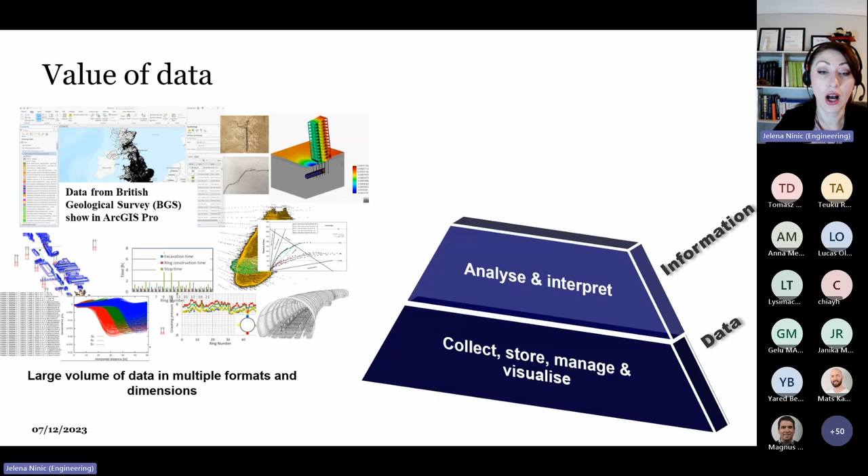What our goal is, is actually to start with this data and then proceed and research from collecting, managing, and visualizing this data to actually extract some information by modeling, analyzing, and interpreting this data. Moving forward to this pyramid of knowledge, from this analysis and interpretation, we always want to learn and to improve. And finally, we want to become wiser. So we want to generate models that are scalable, that are generalizable, that are shareable, and all this is very research intensive. You will all appreciate that digitalization in engineering is overall a new, let's say, arena.

Perhaps starting in the last 20 years, and digitalization in geotechnical and underground engineering is even a bit more recent trend. If we look at the research published over the past 15 years, we can see an increasing trend in research and journal publication in BIM for underground engineering and tunneling.

We can see that BIM for geotechnical applications, including slope stability, foundations, deep excavations, and so on, is also an increasing trend due to its obvious importance. However, it's a bit lagging compared to BIM for tunneling.

If we look at the latest demands for underground engineering, we know that our projects are not only required to be robust, cheap and delivered on time, but they must be risk-free and sustainable. This is something that more and more will be included in research, education and practice.

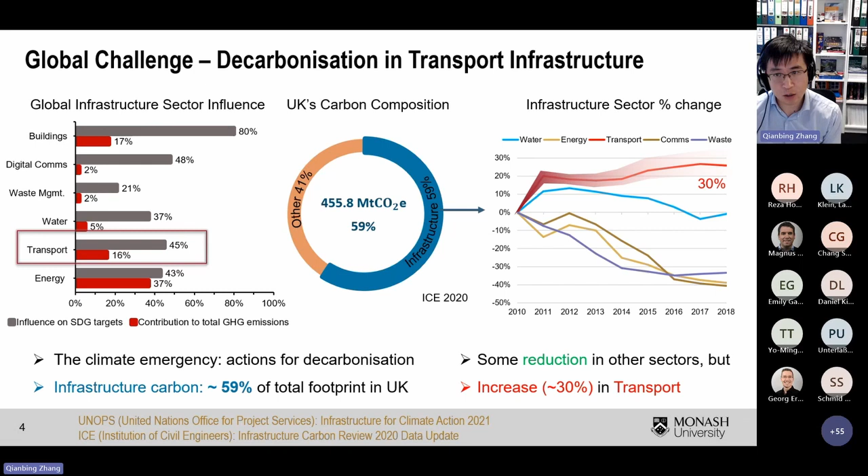CO2 emissions have been organized by different organizations, and one of these is the GCCA CO2 emission reduction potential. We can see up to 2050, the emission reduction potential toward net zero, with the majority of the contribution being relevant to our research. We can see clearly most of them are relevant to our research.

For example, the highest potential would be CCS, carbon capture and storage. And others, for example the first one, efficient design and construction, efficiency in concrete production, are all directly relevant to the infrastructure we're going to build.

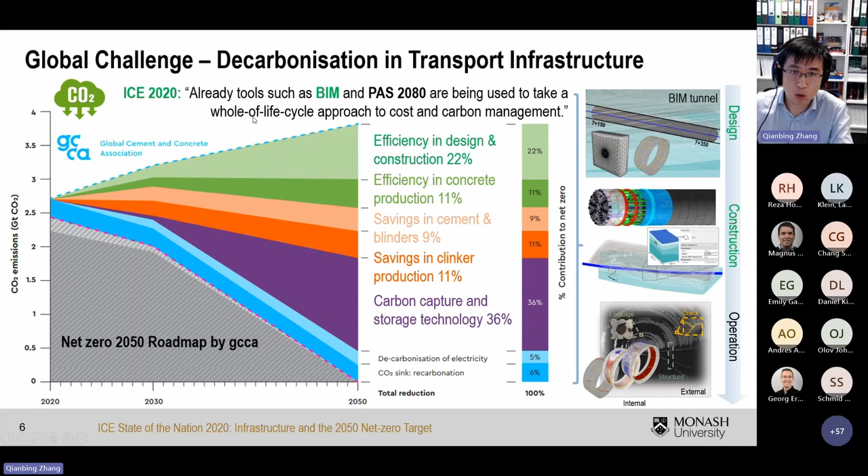In terms of BIM, we mentioned a lot at the beginning, particularly summarized by Jelena on digital transformation globally. We can clearly see globally that most countries have already placed BIM or digitalization as mandatory for the majority of major infrastructure projects. We have summarized most of these standards implemented in current major infrastructure projects.

If you're already aware of, or trying to understand how BIM will influence your project design, this provides some very draft design guidelines. In terms of design, particularly digital underground construction, we have one review paper covering BIM, machine learning, and computer vision in digital underground construction. If you have any interest in underground construction technologies, this can provide you some references, particularly from the best resources to understand more about digitalization.

So the majority of organizations already implement digital and decarbonization into project design. Once we look at this, the most popular rating standard systems have been summarized here. UK, Europe, and Australia have different standards.

If we summarize all these standards together, since each has different focuses, we can clearly see this, particularly since 2010, and most of these standards have different versions. Most of what's summarized in this table has been used for infrastructure, not only for buildings.

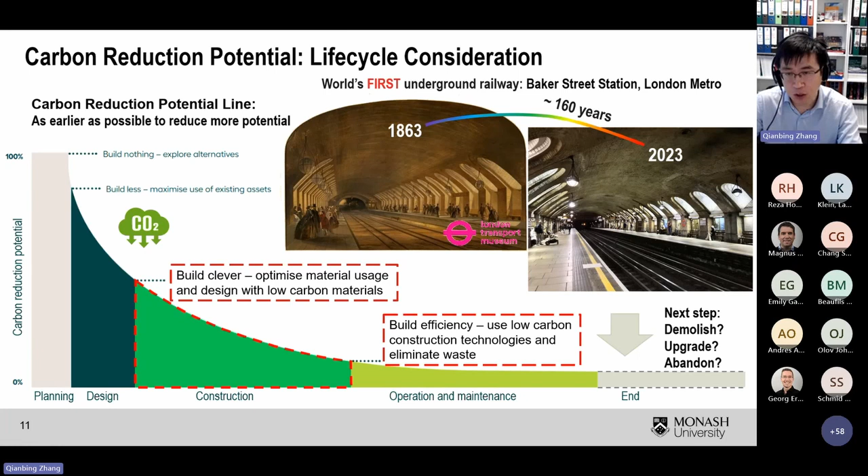And it performs well, which means if we directly implement building information rating systems for infrastructure rating, they will potentially have different understanding or bring errors to the rating values. That's why it's important to use different standards and different digital tools to transparently manage the data.

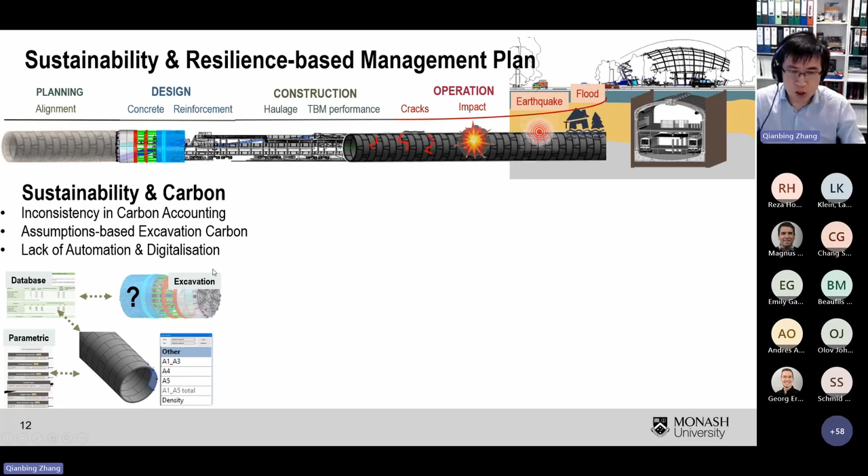The topic today I'm going to cover is mainly sustainability, and some of digitalization's meaning is for your information only, because we had the first workshop organized last year with two distinguished speakers covering more on the BIM part. I'll briefly give you some information about BIM, what we're using here, and more information on the digitalization of sustainability.

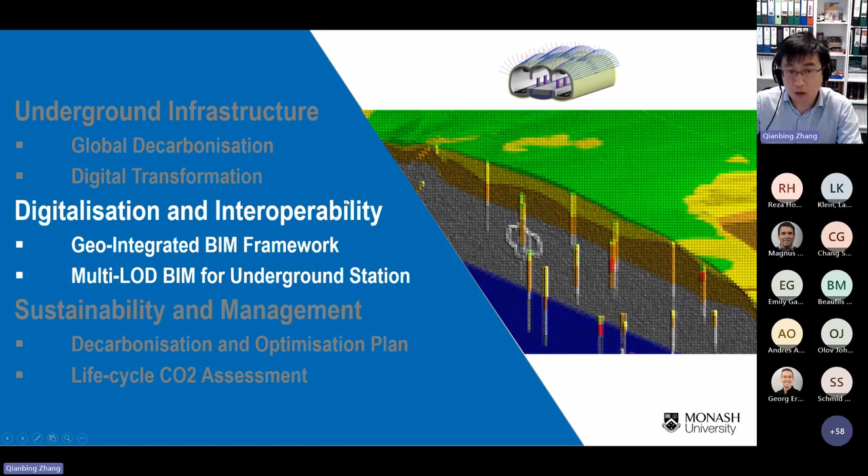So for the second part, I'll quickly go through this. This is mainly to solve the interoperability problem, considering a geo-integrated platform. We call this a centralized platform.

We mainly divide this into 3 categories from the digitalization design, based on different infrastructure types with different levels of detail, then mainly consider sustainability analysis, and then for carbon assessment, eventually to optimize different infrastructure designs.

Once we talk about digital tools or BIM, we always mention level of details, which means the more information or more level of detail you have, the richer the data or information you will achieve.

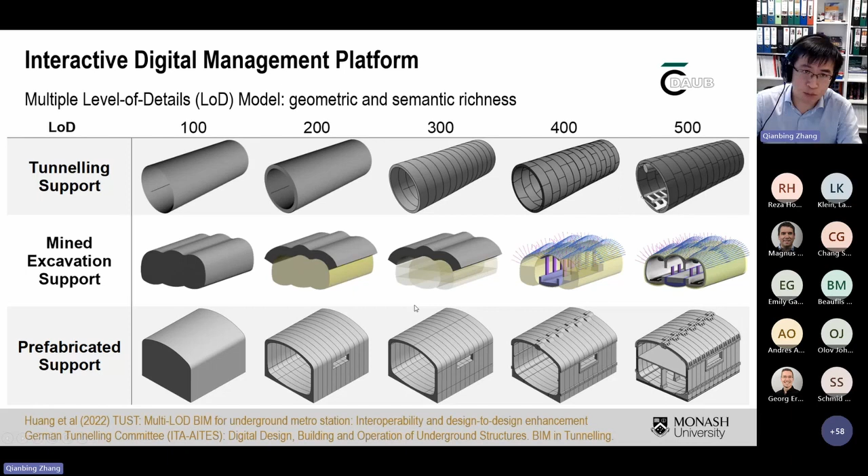In this study, I'll share with you 3 case studies, mainly for the tunnel, the mined cavern stations, and the prefabrication stations. If you need more definitions and classifications of different BIM models, these 2 references are for further study.

In terms of different BIM used for underground construction, most BIM for underground construction at the moment is used as design BIM, which means we have geometric information of the structure, and then we have design, all based on parametric studies.

I have some videos here demonstrating how we use Revit and Dynamo to control how we directly implement parametric AutoCAD models into the Revit model, eventually delivering the underground design. So this is part of the as-design BIM we're using.

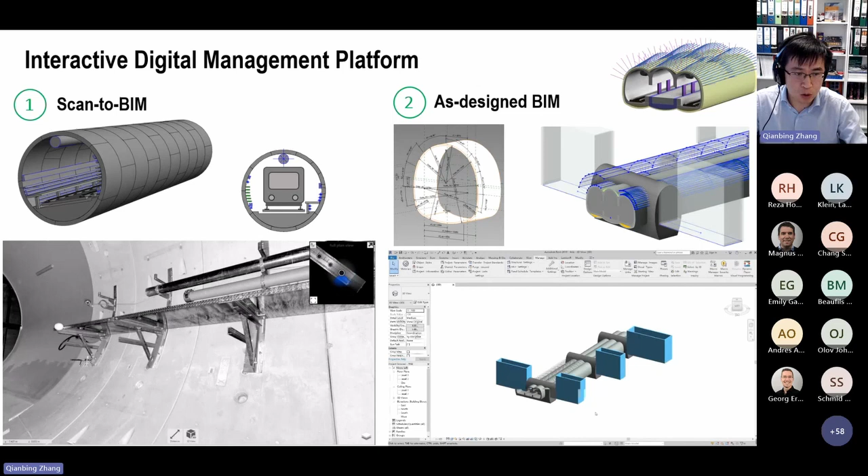On the other side, since some projects were finished many years ago, for example an already-built tunnel, we can directly use a laser scanner to get the data or point cloud scan, then develop code to transfer the point cloud data into the BIM. This is also widely used for existing projects, normally called scan to BIM.

The quality and level of detail really depends on the quality of the laser scanner and the details of the underground infrastructure. This is just a demonstration using the Victoria Tunnel Center to show how to use scan to BIM.

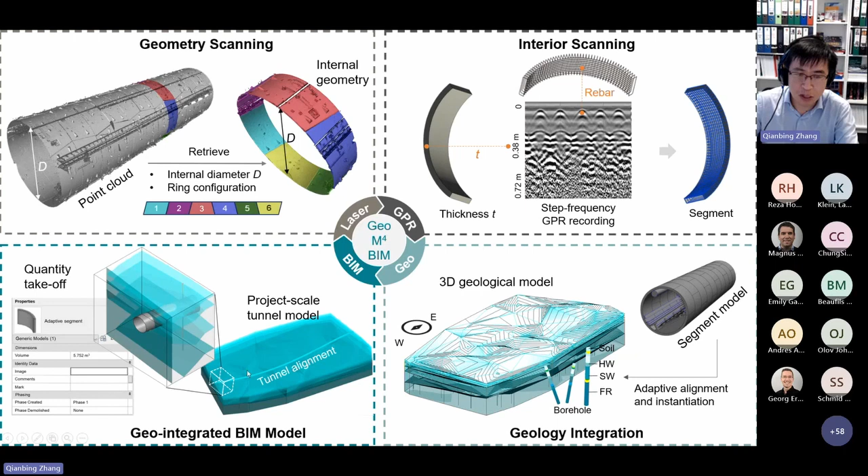Once we finish the scan to BIM for an existing tunnel, we only understand internal geometric information, so we use monitoring tools like GPR radar to monitor the thickness of the lining or the internal structure. Eventually, we build a segment model based on the laser scanner and GPR model, so we can put together a 3D geological model, then design different project-scale tunnel models. I'm not going to introduce the detail, but I have a project to show how we can use this model.

As mentioned, if we use scan to BIM, we can also use it within the above framework as design BIM. For example, we can define different objects, and all these objects will be assigned different material properties. Further, as geotechnical underground tunnel engineers, we must consider geological information.

The second part is based on model-based collaboration. We cannot exactly call it a digital twin, but at this stage we try to integrate the physical model and monitoring data into the digital model, eventually to predict potential failure or long-term deformation changes. We just use a simplified geological modeling approach.

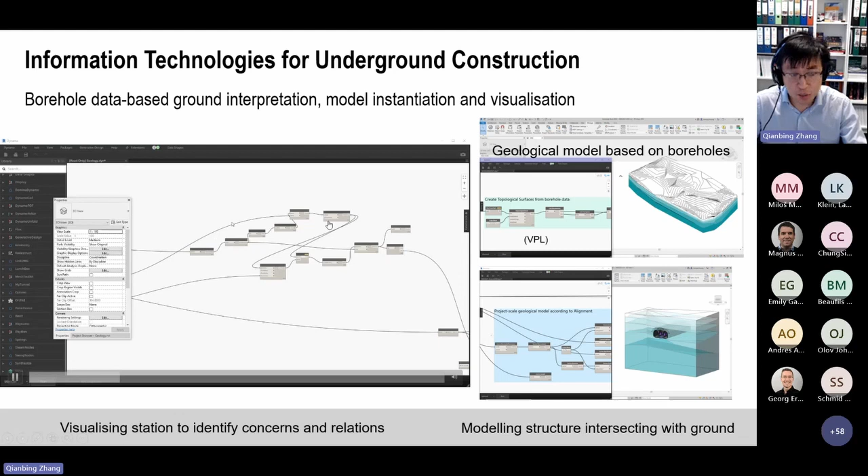A more sophisticated model using other 3-dimensional geological modeling software is possible, but it brings interoperability issues because different software have different formats. At this stage, I believe most of us face the challenge of having so many different sources or software, but deciding which software to select for the study brings a lot of challenges.

At this stage, we're using Revit again, using parametric scripts and Dynamo to control or build a 3-dimensional geological model. Basically, we have two steps. The first is to build the geological model, mainly based on the borehole information we have. The second step is how to directly implement or incorporate existing BIM models into this 3D geological model, which can be streamlined directly using Revit.

The reason we're using Revit is that it opens up scripting with Python to integrate with different numerical modeling software. I'll quickly go through this. This has already been built for existing numerical modeling tools. For example, I'll show the next one.

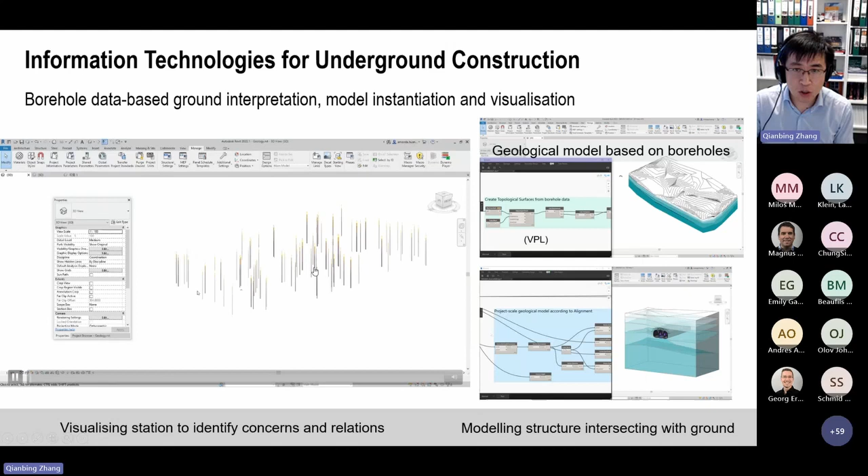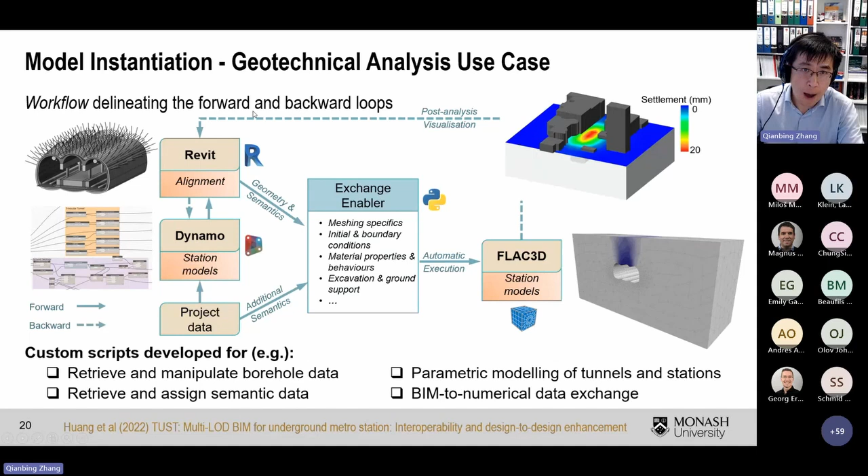Once we finish the first part of our 3D geological model, we have to develop tools - what we call exchange enabler tools - which means we define different functions and different family types of the model. In this scenario, with trinocular caverns, it's quite a complex structure with different supporting structures. Then we have automatic execution in the software, using FLAC3D. Once we finish the calculations, all the post-analysis and visualization can also loop back through the exchange-enabled tool to Revit for visualization purposes.

Looking at actual applications, we can directly use Revit or Dynamo to control all these design parameters, including different overburden, different lining thickness, whether there's systematic bolting or not, and the column spacing of the underground support, giving us parametric design information directly from Revit.

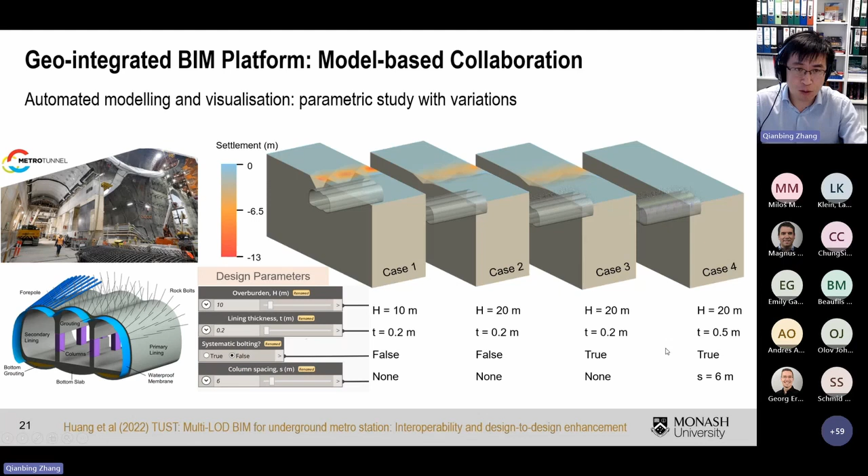Using this Revit function, the next level is how we manage the data and integrate existing monitoring data. For example, with monitoring data from a project starting at excavation until near the end of the project, we can see the change in deformation directly integrated into the model.

The challenge at the moment, as mentioned, is that developing 3D geological modeling brings additional challenges for building interoperability between the BIM model and the 3D geological modeling. Particularly with very difficult ground conditions such as fault dikes, this brings additional challenges for interoperability. So it's not only about digital twin issues, but also interoperability between different software.

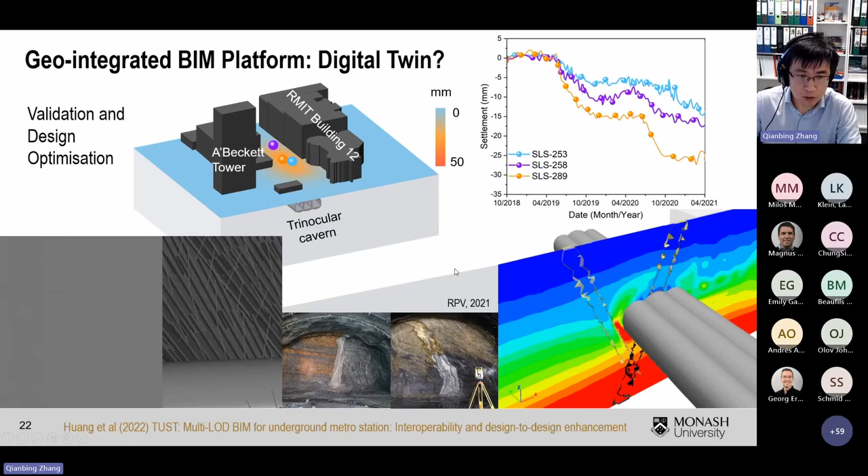I will mainly introduce the sustainability part now. The reason I bring your attention to the importance of digitalization is that, in terms of calculating digital information, the value of the information connected from digital tools will be directly used for calculating sustainability. As mentioned at the beginning, CO2 emissions from infrastructure projects are particularly important.

If you look at Australia's current transport infrastructure investment, there are 124 major projects, and 58 of them are in the pipeline.

In particular, within these few years, there's around 25% increased tunneling projects. So the challenge at the moment is how we're going to integrate digitalization and sustainability, particularly on resilience. Comparing surface and subsurface conditions, there are some similarities, but the subsurface has its own challenges.

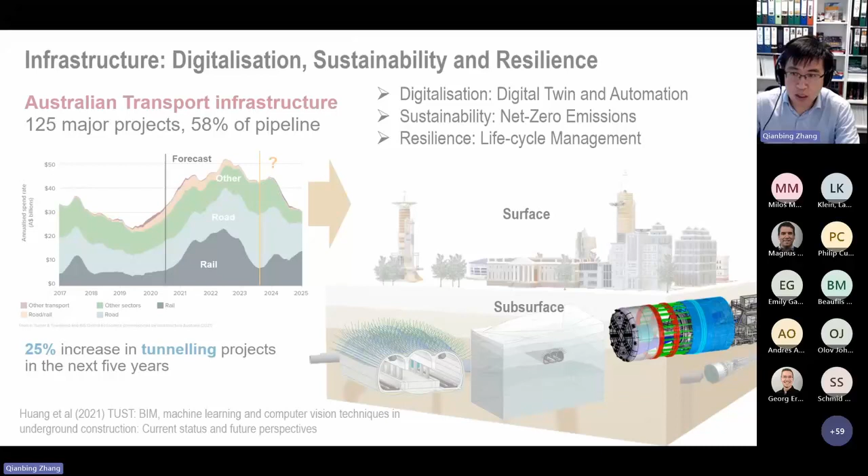If you look at the data we connected here, this is all the current ongoing projects in Australia. For visualization purposes, the operation data is set on 20 years only. For example, each project has construction induced emissions, this number, and operation for 20 years, we have this number.

The calculation of this basic data is from EES or EIS, and the unit is given here, and the calculation is based on the scope-based method. We can see the different states in Australia, 3 states here, and 3 different infrastructure types, road, railway, and metro.

Eventually all these projects will contribute different CO2 emissions. So how are we going to make a decision? Are we going to use directly a net zero project design, or a resilience-based design, or a cost dominating design?

All this is based on the complementary nature of each factor, so we cannot directly use one particular method. Mathematically it's quite simple - if we have a level of detail, very simple or very high information level, eventually it gives you different CO2 emissions.

I will introduce more on this project. This is 3 of the current ongoing projects in Victoria. If you're familiar with the Australian Victoria state, from 1971 to 1985, around 40 years ago, we only had the city loop.

Most recently, there are 4 projects that have been planned or already finished construction. This is the length of tunnel - this particular suburb rail is 90 kilometers. Monash University is located here.

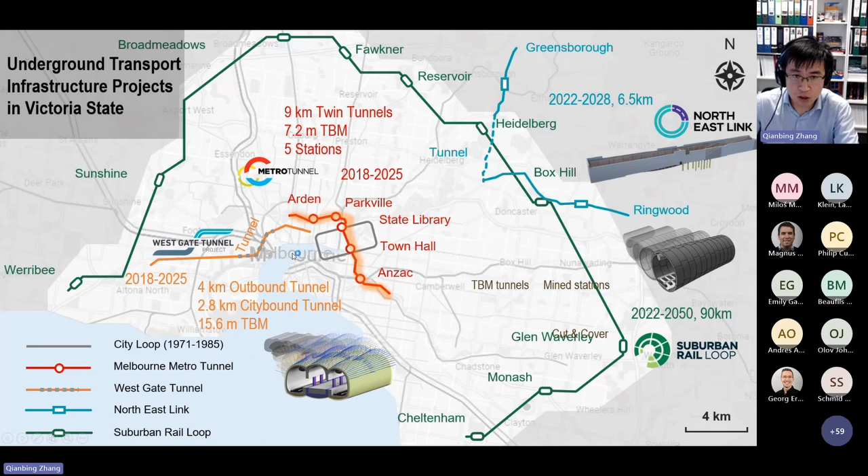There is no station for this road tunnel, Westgate Tunnel. So let's have a close look at what the other data looks like. This is 2 emission total numbers based on the scope-based method, scope 1 to 3.

We can see the emission - the majority emission actually is in scope 3. You can see scope 3 for the metro tunnel is 18 for the tunnel, and the station is 48. This massive amount of concrete has been used to build this station.

For the TBM tunnel or Westgate Tunnel, we can see this 71%, which means the majority is coming from scope 3. So what does scope 3 cover? Scope 3 majorly includes segment lining and also building different castings of concrete.

Scope 2 is something we can have a simple demonstration of - this is for schematic purposes only. For the road tunnel, this is the actual scale ratio, 7.2 and 15.6. In the entire presentation, I'm using these 2 as a benchmark or baseline for the calculation.

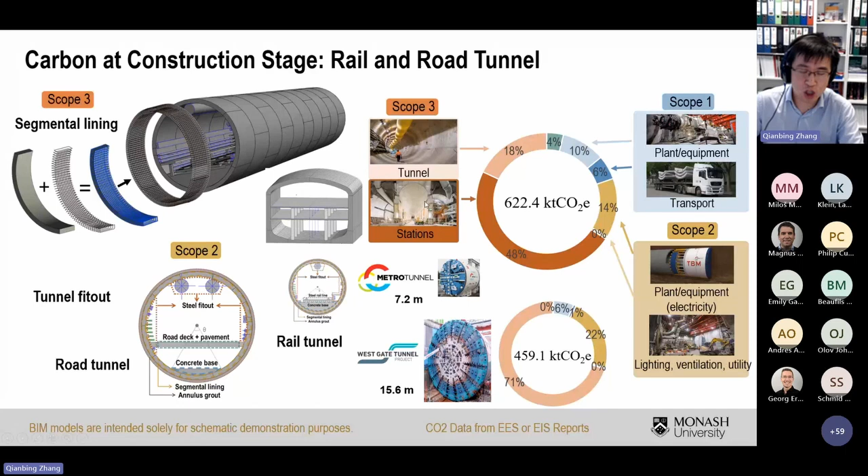For the other 2 parts, scope 1 is by using different equipment, transport. Scope 2 is majorly for the operation, lighting, or ventilation purpose. So those 3 have the potential to reduce emissions, but how are we going to reduce them? How are we going to calculate them more efficiently?

Taking the 7.2 meter, 9 kilometer example, we can see all these already have a breakdown of emissions. Embodied carbon in tunnel is number 1, embodied carbon station is number 2, and for the operation stage, this is only for 20 years. We can see the massive amount still in the operation stage.

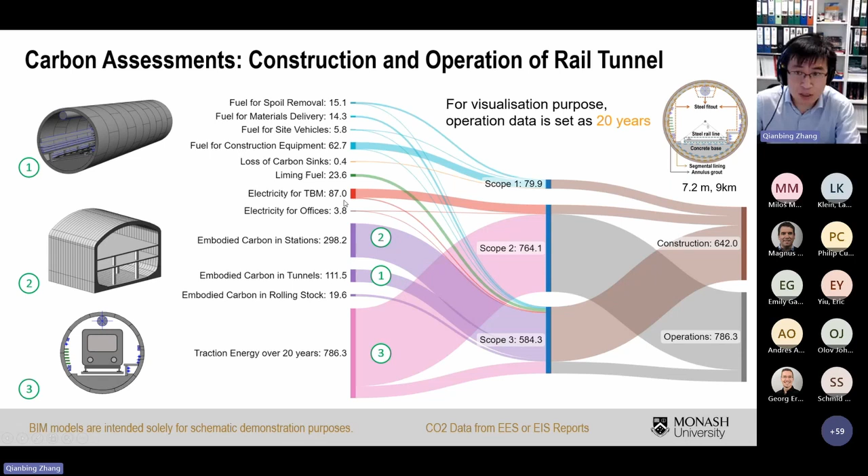There are many other emission numbers. I'm going to give you more information on how they calculate these numbers. If you're not familiar with this standard, you can get more information from those names here, and we also have a recently published paper.

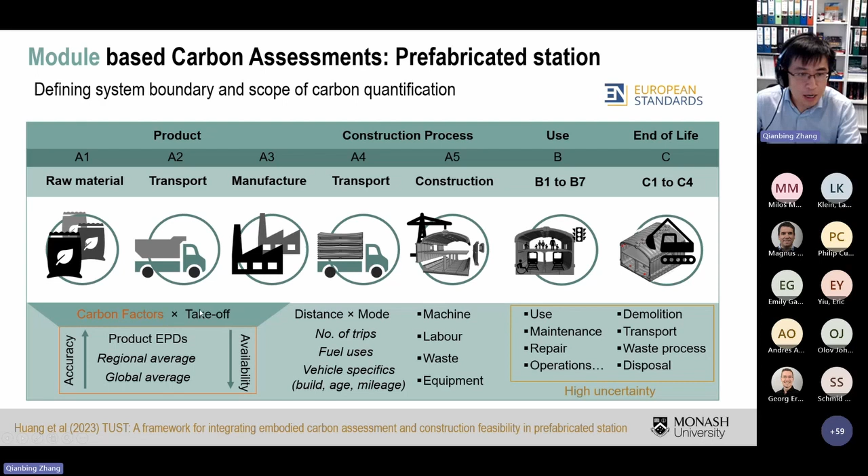Let's take a look at close. If we know all these numbers and based on digitalization or BIM model, we can easily have found the carbon factor of each of these numbers and then have a takeoff of this number. Eventually, we can calculate all these emissions.

As I mentioned at the beginning, we are using parametric design for all the underground construction. And functionalities in terms of this, we have developed this closed loop of Revit-based parametric modeling. At this stage, we incorporate sustainability, so this is the standard we're using, which means we can integrate all these 3 together. And hopefully at the end of the project, we can build a digital twin for the project.

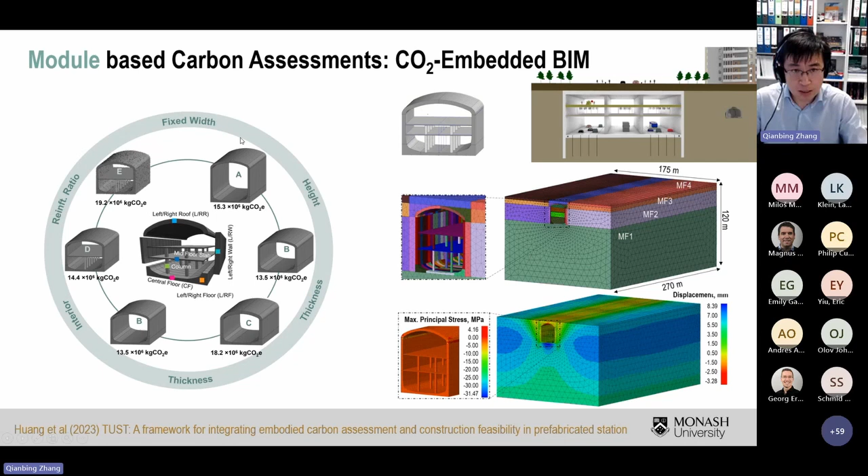So this is one we can easily use to have different names for parametric control. If we know this project very well, clearly in the dimension, the next stage would be how we're going to use different information. If we control width as the same, and then change different height, thickness, and interior structures, and change different reinforcement ratio, easily we can calculate those numbers.

This is normally called embodied carbon, and can also be easily calculated if we know this volume directly from Revit, for example. Once we finish the design, our next stage is the functionality, which means if we select the last one here as the final design, we can use the same framework we introduced previously, which can also be parametrically controlled to eventually calculate the stability issues as well.

So which means we cover not only CO2 emission, but also safety and stability of the project. Some of the factors I believe you know very well in terms of construction simulation, so we're using this one for building the construction. The detailed information is given in this paper.

We also developed a virtual sensor here. If we have integrated modeling or monitoring data, we can directly use those sensors to predict the potential changes or potential risk areas.

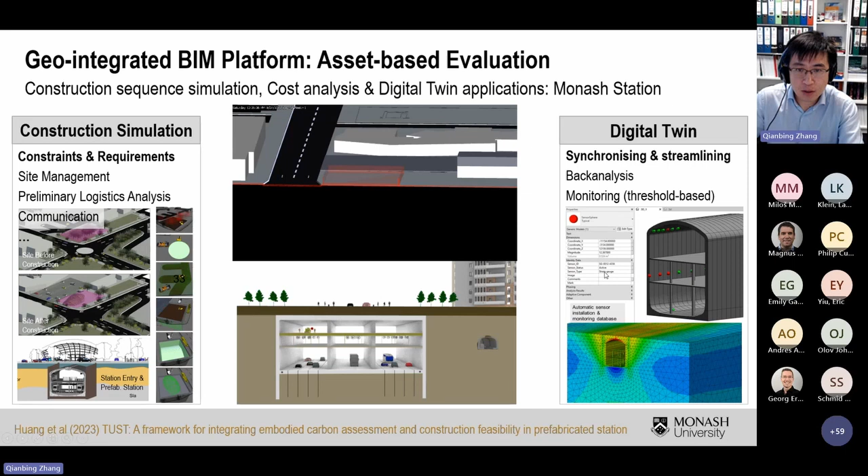Overall, we usually use prefabrication station, but most of the project I mentioned at the beginning is the TBM tunneling. This is quite simple, or nearly the same as the one I introduced for the prefabrication station. If we select an LOD 400 example, and know all this ground information or dimensions here, that's the next step - easily we can build everything together into the digital model.

This means we design this information and build a three-dimensional geological model, and select different alignment, then control different diameters, segment width, material, standard bolt. Once we finish this model, we can clearly see it can be directly imported for numerical modeling. We can also use analytical solution or empirical study as well, depending on which stage of the project I design.

At this stage, we're not using three-dimensional modeling, but just simply showing you - it can be easily used as three-dimensional modeling, as shown here, mainly because this can be directly implemented into the software by using analytical solution. The second stage is mainly about how to select different concrete or different reinforcement ratio. So this is a lining we normally have.

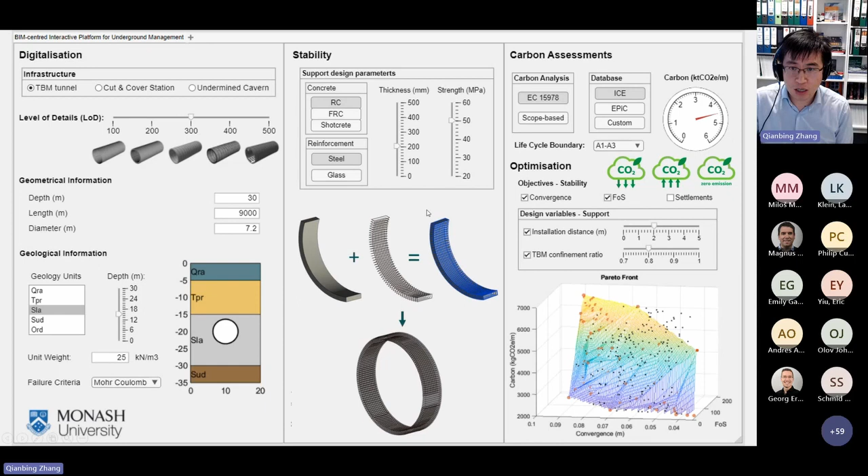So the next step, once we have the quantitative information of all the lining thickness dimension, now we move to the carbon assessment, which means we see if we have reduced or increased, or if we achieve net zero or not. This is covering the overall project. For the TBM tunneling, which has more stages than the prefabrication stage, meaning beyond the stage, the TBM or other equipment can be reused or recycled.

So this standard was updated last year - this is the latest version, 2022. So again, I'm not going to cover the details.

Mainly, we're going to introduce A1, A2, A3, which is the same as embodied carbon, and A4 transport of lining segments depending on the trips and also different fuel use, distance, or vehicle type. The construction is based on TBM or spoil removal. Use and end-of-life is still very difficult to calculate at this stage - if you have any data, we are happy to try to use the data for calibration.

We have also done some analysis on reuse and recycling. The paper is currently under review, so this is the information here.

For A1 to A3, it's the same as previously mentioned using the prefabrication stage, same principle. The most interesting part is how you calculate the TBM emission. We understand TBM drives in different directions under different ground conditions, generating different driving directions and consuming different power, which generates different emissions.

That's why I'm more interested in how to calculate TBM emissions, because once we can calculate TBM, we can easily calculate the carbon baseline for segment lining. As mentioned at the beginning, different standards exist - we collect all the publicly available information from standards in different countries in terms of different carbon factors.

If we know the volume and the carbon factor, we can easily multiply them. We have a strength grade, and also substitution materials - if we have these, we have the potential to reduce CO2 emissions. This will be available online.

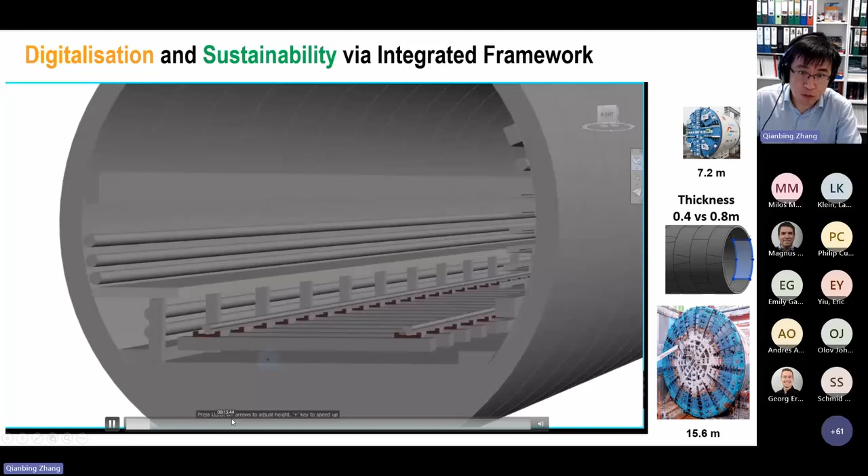As mentioned at the beginning, for the majority of existing projects we can also use scattered BIM information - once we have BIM information, we know all the quantitative volume, and when we know the carbon factors, by using parametric tools like Rhino, Revit, Dynamo or Grasshopper, we can calculate data to save a lot of time.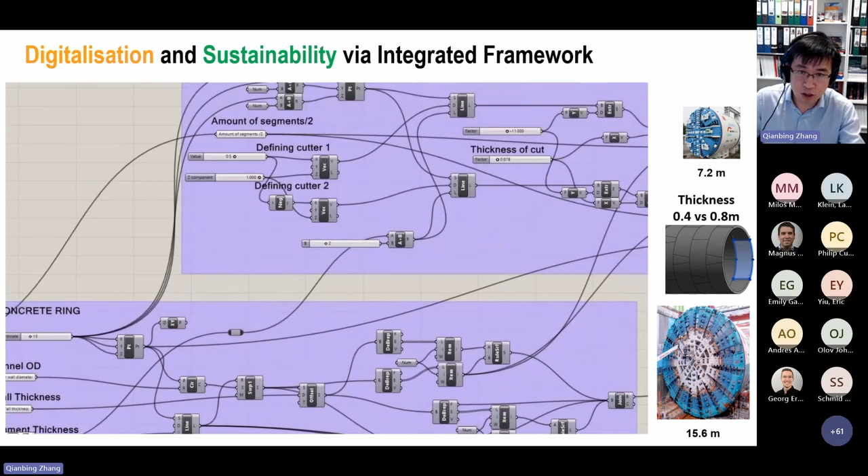Most existing standards or databases also have the possibility or pathway to integrate with BIM. So now we have 2 different projects - the design of one is 7.2, and the second one is 15.6.

For the first one, we can see the generated model quickly shows this information. If we change the thickness of the segment, the emission will be automatically generated as well. Once we change this to 15.6, the diameter is quite larger, and we can see emission numbers significantly increase - this can also be automatically calculated.

As mentioned at the beginning, once we know the distance, lining numbers, thickness, and transport distance, we can clearly determine the emission number. If we know the level of detail 200, that means just the tube, the concrete tube.

If we have level of detail 400, it covers more information. You can see that with a higher level of detail for the lining or tunnel, the total emission number will increase. We have a lot of emission types given here.

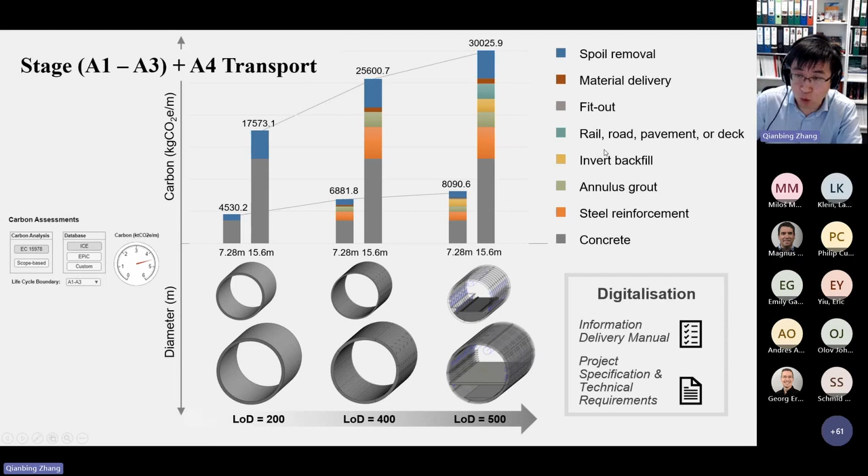At the low level, we mainly have the concrete and the spoil removal - it keeps the same value at level of detail 400 and 500. But at 500, we can see the interior structure or outer face is completely different, giving us more detailed information. All this includes A1 to A4.

Now we look at the emission numbers for the analytical solution. As geotech engineers, we understand very well how to use different numerical modeling, or CCM, or volume loss - these are basic, fundamental issues in underground design. Knowing this information, we can easily calculate the TBM driving direction and TBM support information.

We can also calculate potential normalized convergence or changes in support pressure. All this information can easily be implemented into the digital platform. Once we have different diameters from 4 to 16, covering the majority of tunneling information, we can see the embodied carbon emissions here, along with different safety factors. If we have other factors like cost, we can definitely integrate them into the design platform.

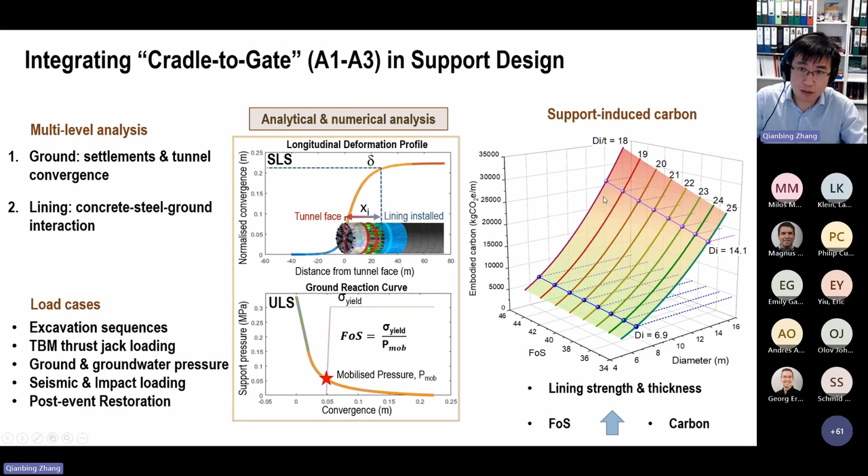Now, once we finish A1 to A4, there's A5, the construction stage - as mentioned at the beginning, if we know the TBM power, we can generate the emission as well.

This is just a scenario to show you that once we have different topography, all this will have different pressure or in situ stress. Once the TBM is driving through different thicknesses or depths of tunneling, the power used will be completely different. So we calculate all this information based on analytical or empirical equations. If you select a different empirical equation for different TBMs, you will eventually generate different power values. Let's take a look at how we're going to calculate them.

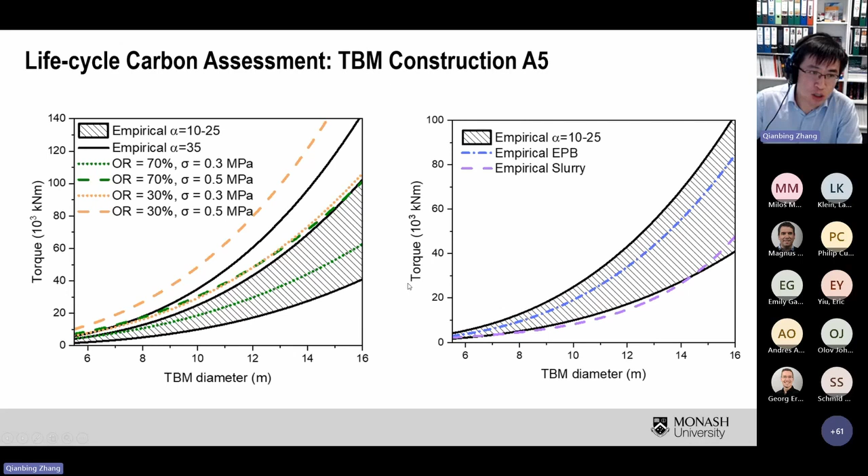The majority of TBMs will have two different functions, torque information. If you have a larger TBM, you definitely have higher torque numbers, and based on different calculation methods we can calculate the TBM-generated embodied carbon. All this carbon can be categorized into different scenarios. For example, we calculate them based on information about the thickness or depths of the underground project. In situ stress here indicates the depth of the project. The higher or deeper the project, the higher emission we generate.

That would make sense. If we look at all the information from A1 to A5, only A5 is varied data depending on the depth of the project. If we have higher in situ stress, then we can see this excavation emission will vary, which means material transport is normally a fixed number for construction, lining is also a fixed number, but excavation emission for a project will vary depending on the depth, ground conditions, and different types of rock and soil. This is something different we observed from the recent study.

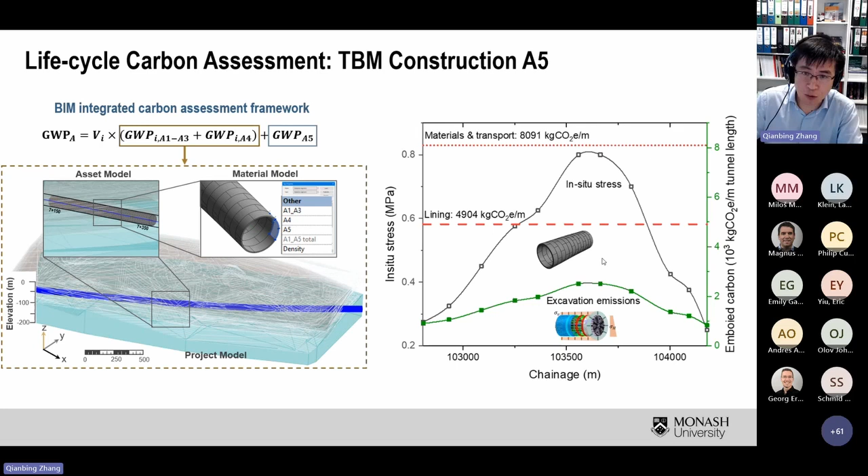Eventually we'll put all the numbers together to calculate and optimize the data. I'll show you the data here quickly. Once we know the emission numbers from A1 to A3 or even A5, if we know this is different - factor of safety, cost, or stress information - this shows how we're going to identify the potential baseline for the project we're designing here.

I'll show you an example we are having here. The information we normally have for the project, reduction would be there, but eventually for operation and maintenance, as I mentioned, especially for geotech engineers, we understand there are multiple hazards that will influence the 150-year design life. All this will generate more emissions. For example, if we have normal conditions with cracks, damage, and failure, this will induce potential emission increases under different conditions.

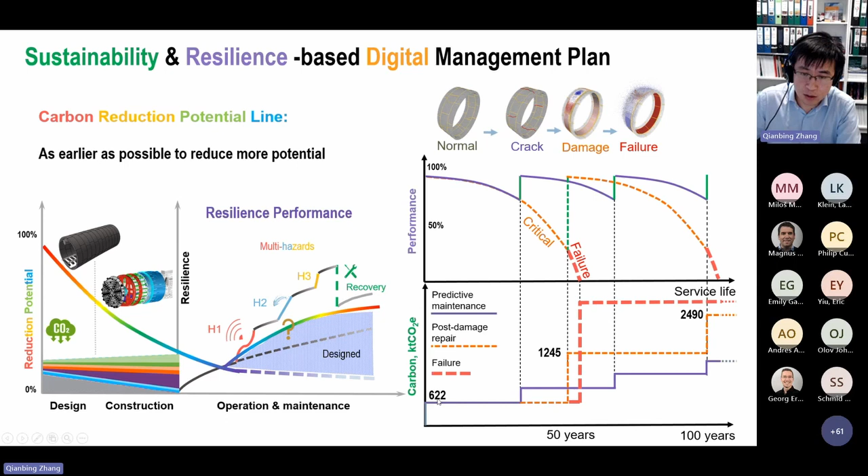This is a standard one we calculate. Then after each stage, because we need to retrofit, replace, or additionally repair this concrete lining, it will generate additional CO2 emission. Until the failure of the project, we have to think about how we're going to find a solution to replace the entire tunnel, for example. This will eventually induce more emissions, and the number can even be 4 times higher than the designed emission, which shows the importance of integrating different service life into the project design.

In this project, I try to introduce more on integrating different digital twins with CO2 emission numbers. The next stage is the most important part - how we're going to assess the performance of resilience, then put them together and use optimized data. Based on the measured performance of the project, if we want a longer service life, we definitely need stronger concrete, but stronger concrete will induce more emissions. These are all conflicting factors. So how are we going to optimize, and what are the potential directions we can work on?

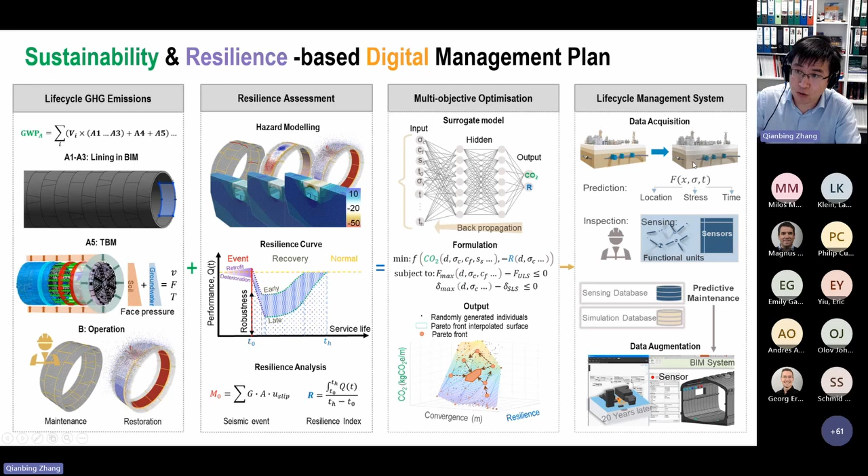Eventually we put all this monitoring data and prediction together, because we are doing geological engineering, geotech engineering - we can predict the potential changes after 150 years. This is why geological or underground projects are significantly different from surface buildings, because underground information will change. We have to monitor and predict the potential change over the life cycle, even longer than for surface buildings. So putting it all together, we introduce the platform covering digital twins, then calculate the CO2 emissions, and monitoring sensors for back analysis, putting them together as an interactive platform.

I believe this is all the slides I have. If you have any further information, I have some published papers already in this slide - you can find more information there. Thank you so much.

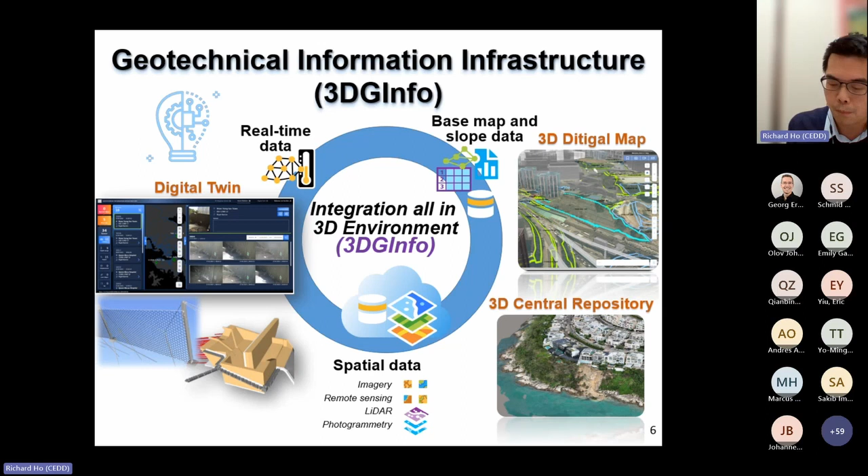So this is the new user interface about 3DGInfo. You can easily access the slope information, for example the basic slope geometry, consequence-to-life category, maintenance record, and the maintenance responsibilities of each slope in parallel with this 3D digital map.

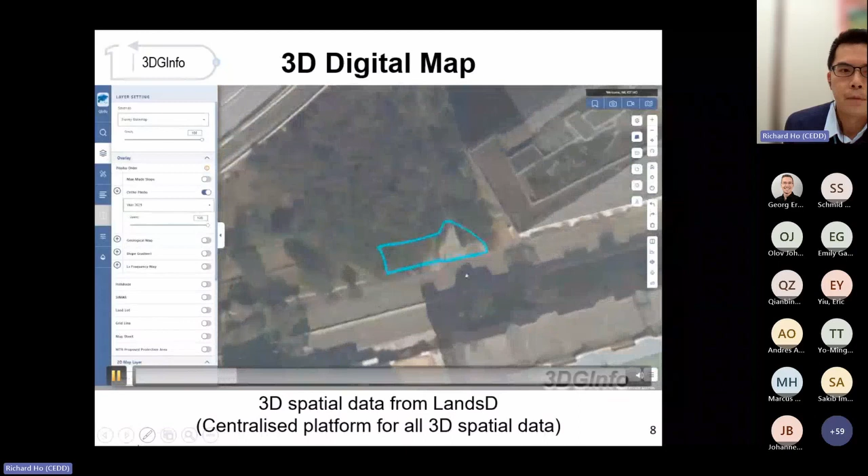As I mentioned previously, 3DGInfo can now contain and visualize the landslide model created by LiDAR data and photogrammetry technique. We have established an operation procedure with our internal survey team for carrying out immediate LiDAR and photogrammetry survey after any significant landslide reported. The landslide 3D model will then be uploaded to 3DGInfo directly.

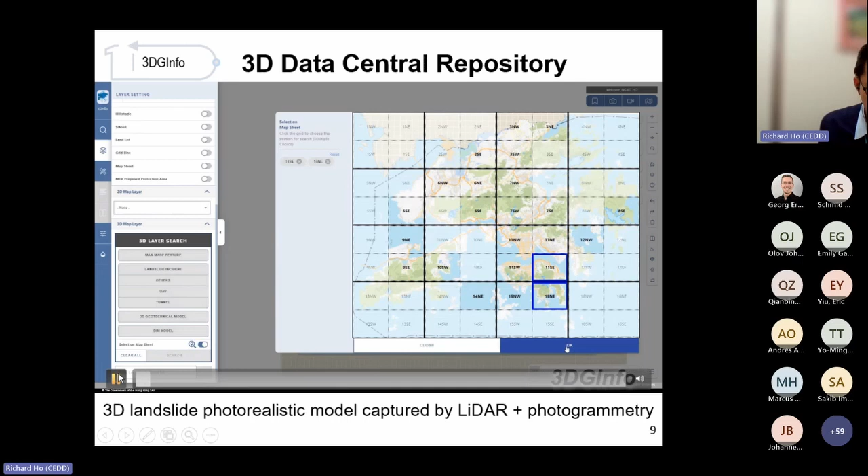Now I would like to show you another video. In this video, it shows the Yiu Hing Road, which is one of the biggest landslides in Hong Kong during the bad rainstorm in September this year.

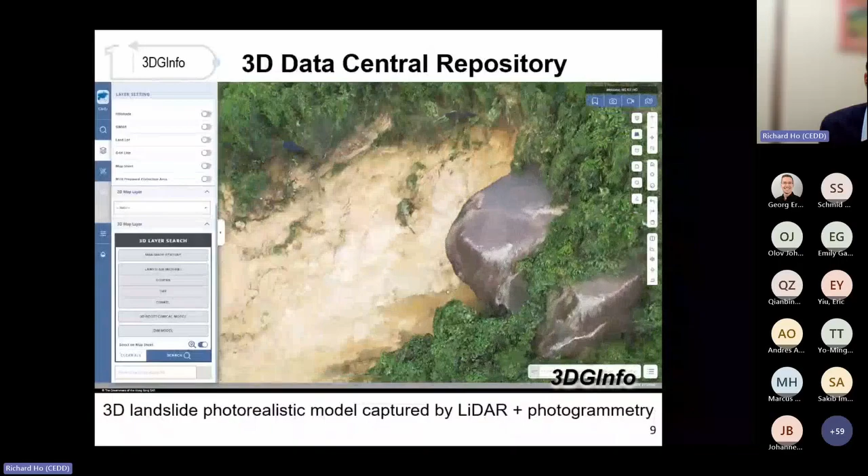As you can see, when we input the 3D model into 3DGInfo, we can manipulate it from all directions, all angles. What is the benefit of this? Using the 3D spatial model, it can facilitate us to review the residual risk of the landslide impact, and help us make decisions for follow-up action and more information for subsequent landslide investigation.

Here is another example captured in the current 3DGInfo, of landslides that occurred this year. For this 3D model, we have utilized both LiDAR and photogrammetry techniques. The LiDAR technique can help us eliminate heavy vegetation and delineate the existing ground profile. For the mesh model created by photogrammetry, this allows us to easily identify the feature characteristics and assist in later engineering analysis, such as debris mobility assessment.

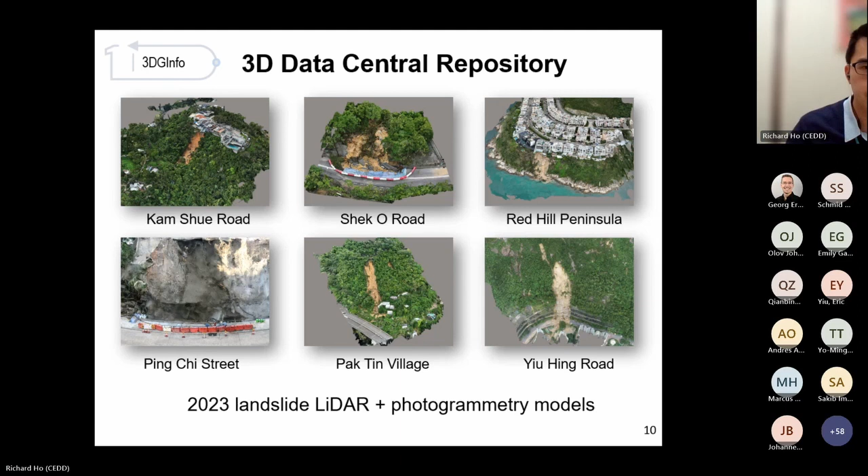The mitigation measures, such as rigid and flexible barriers installed on natural terrain, are also put inside the 3DGInfo.

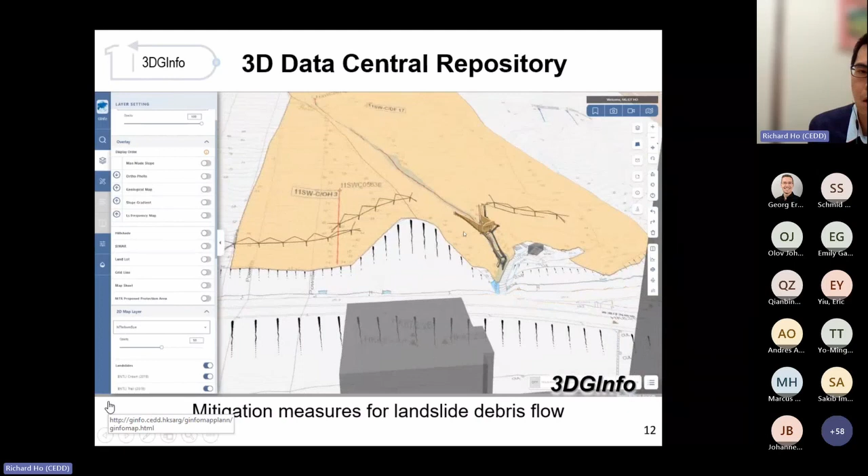As you can see, we can put the BIM model of the rigid barrier and also the flexible barrier into this 3D mapping system. And we can also input the barrier energy rating, design impact velocity, and retention volume of the rigid and flexible barrier, which can facilitate our asset management and facility management.

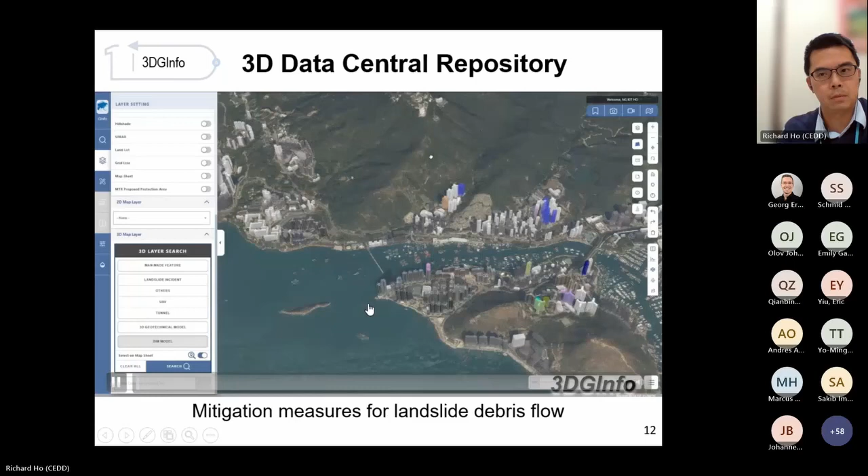The benefit of this device is that they are handy and easy to use, and they can actually mount on smart robots for site inspection at dangerous environments, such as landslide sites and confined spaces. The good thing about them is that they provide the 3D model for us, which is a major, important ingredient in building a 3D scene in digital twin.

So the next topic is about the development of the 3D geotechnical model. In parallel to the development of the 3DGInfo, we have also tried to create a 3D geotechnical model, which we call 3D GM of Hong Kong, by using available GI data, about 300,000 GI boreholes.

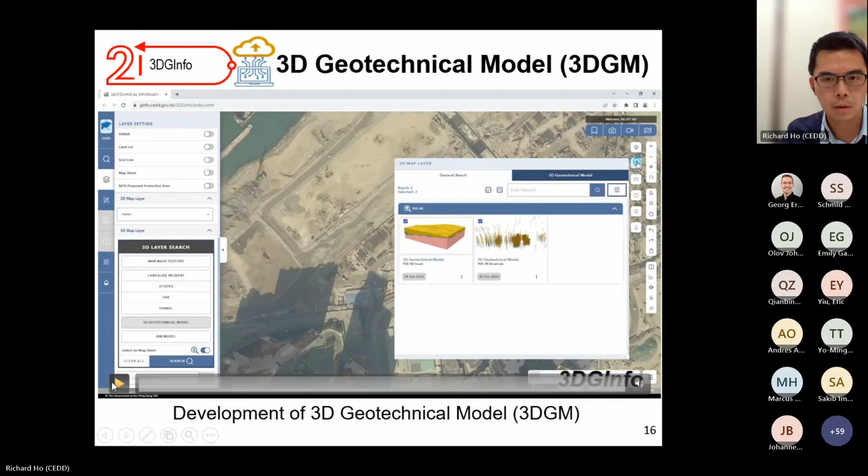Imagine this 3D GM can be viewed by all practitioners online. You do not have to worry about the software. Anyone with internet access can view this ground profile and have an idea of the rockhead level in the area of interest.

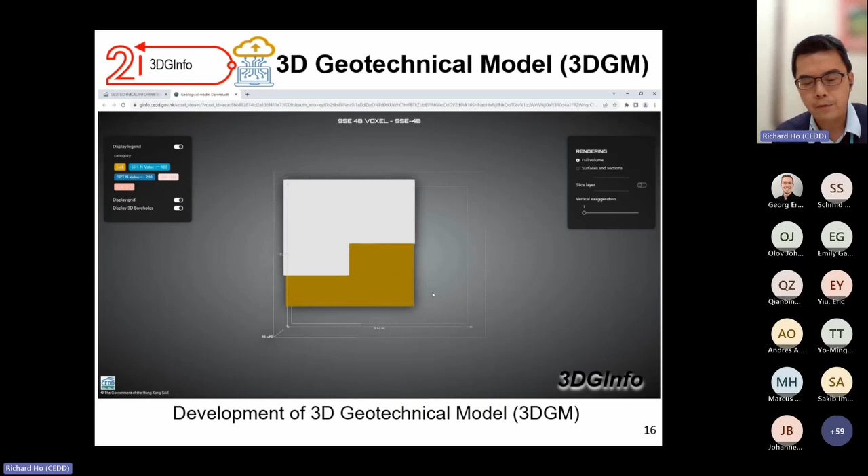An additional user interface, as you can see here, we call it Voxel Viewer. It is a user-friendly platform that allows us to further manipulate the 3D GM. As you can see, we can cut cross-sections from different angles.

In the coming year, we are going to upgrade this Voxel Viewer. Hopefully we can add more useful functions, for example measurement and calculation of volume, and overlay other spatial information on it. We are doing this development work at this moment.

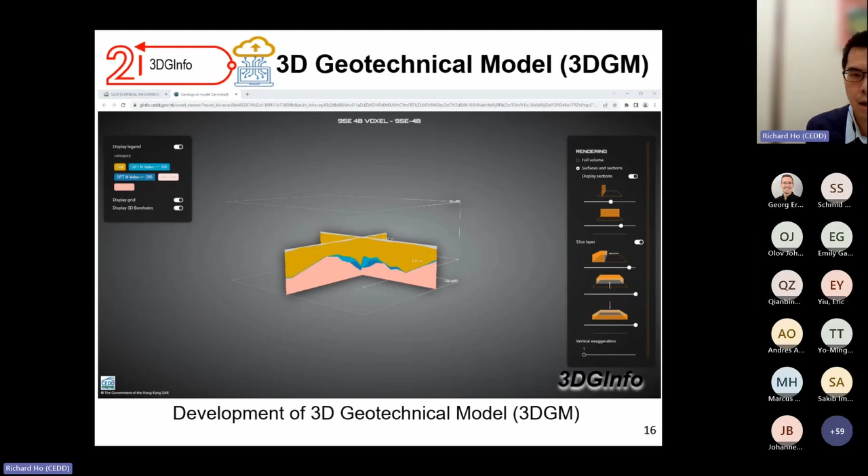So I move to my last part, the 3D GEO digital twin. Our digital twin platform for smart barriers is available on mobile device to facilitate our colleagues on site during emergency service.

I would like to take this opportunity to demonstrate some of the key features of this platform to you. This one is a smart barrier installed near the Queen Mary Hospital in Hong Kong Island. In this online platform, you can view the 3D scene and BIM model of the Queen Mary rigid barrier.

The little points here are some of the IoT sensors. When we click on it, we can see the sensor detail. For example, this is a camera, and we can see the real-time situation or condition of the camera. More than that, we have a function to capture an image if we have a special interest on it.

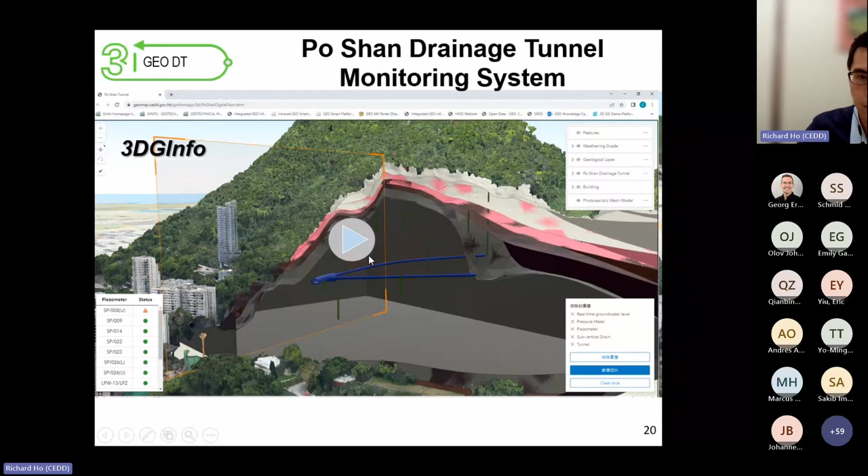This slide shows a Po Shan drainage tunnel. We have physically installed a monitoring system in this tunnel. More than that, we have an online platform to monitor the groundwater condition and the groundwater level.

As you can see, the groundwater level is continuously monitored by pressure gauges installed on the subvertical drain and piezometer of the slope above the tunnel. This platform allows us to view the real-time data through the internet.

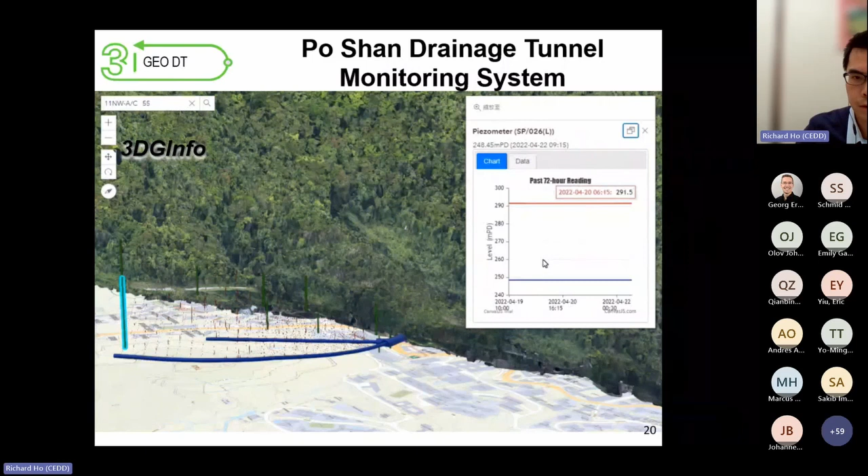The sensor will transmit the data to the GEO server via LoRaWAN, and any blockage will be indicated and notified to the maintenance agent for reminding them to do follow-up action.

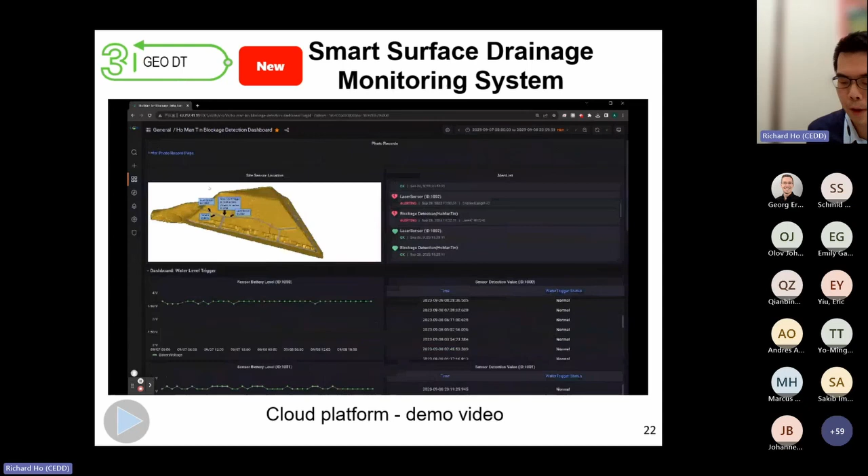This is used to verify the situation during this trial period, and the data is stored on a cloud platform, which means we can access the real-time information anytime online when we want it.

Lastly, you can see we have gained substantial experience in developing IoT systems for our operation, and we will continue to apply it to more of our new features and new facilities. The picture shown here is one of them.

It is our new public works central laboratory, and we are going to install a series of IoT sensors and an automated monitoring system. We are going to build a new online platform to incorporate all the sensor data in this online platform in real time, so that we can monitor and view the condition of this new facility.

And it is currently under development. At last, all of the above smart platforms or IoT systems will be incorporated into a single dashboard, as shown here. We call it our geo-digital twin.

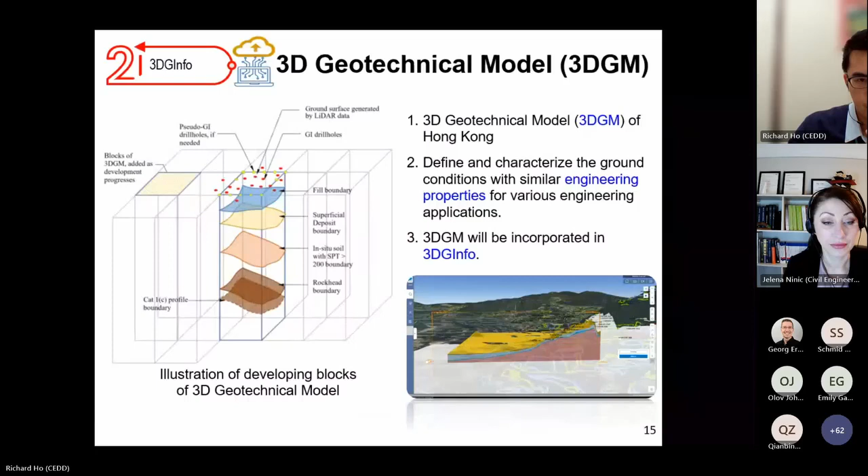And what actually is this format? It is like a Minecraft. We are building up square or rectangular blocks, just like a game, and we put all the blocks together. We can actually make the resolution more detailed, but at this moment we want to make it 1 meter by 1 meter square resolution.

I think we can actually make it a finer resolution, but it will affect the online performance of the computer. Because the objective of our model is for foundation design and preliminary design only, we stick to 1 meter by 1 meter at this moment. We could make it 0.5 or even 0.1, but the trade-off is that the end user may have a less smooth or fluent experience online. There is no technical limitation on the resolution, actually.

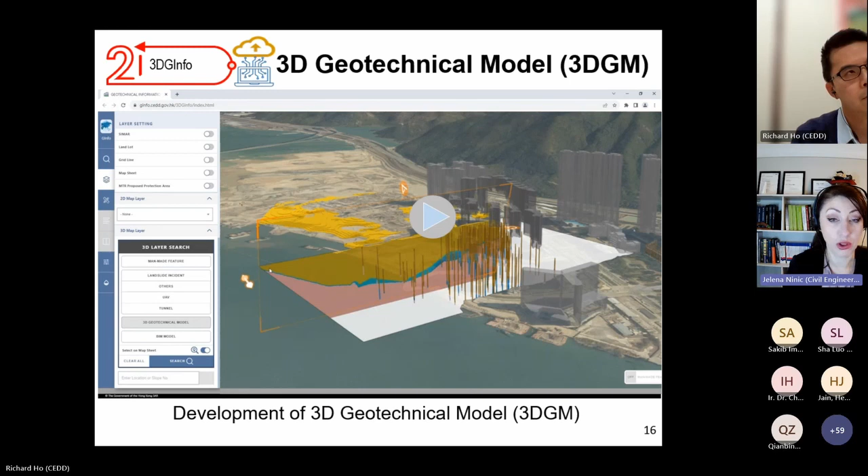Thank you very much, Richard. I will have a very quick technical question, and at the end, another more general question. So we discussed a lot about geology and geotechnical or soil modeling. How about safety structures? Are they also attributed in your GIS-based platform, or do you rely on BIM models and the link of BIM models with GIS models?

We are lucky in Hong Kong because not only our office or department are working on the 3D spatial data. In the 3D GInfo, we are actually using many different spatial data. The building, as you can see here, is actually prepared by our lands department, which has different techniques to build those 3D building models. For example, they use UAV to create photogrammetry models, mesh models, realistic mesh models.

Some of them have specialists - I think they are specialists. They are actually building up 3D objects for each building, and they are not exactly BIM models, but the beauty of our platform is that if we have a BIM model, IFC model, we can input them in this platform. So the good thing is that if we have spatial data from one party, we can put it there. And if we have a BIM model, or photogrammetry or point cloud data, we can put them all into this ArcGIS platform.

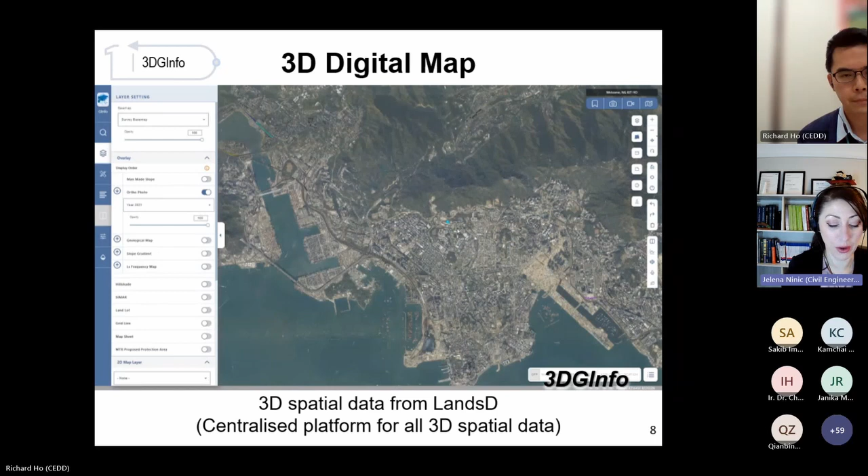Thank you very much. My last question, which will probably have a very short answer: will the landslide data be open to overseas practitioners? And what software do you use to create this digital platform?

To my understanding, for geotechnical practitioners, we should be able to open the platform to you. So when you have the user right to access our platform, you should be able to access the landslide model as shown here. Our primary objective is to share the landslide data and other 3D data with our practitioners.

So in the future, when you have the user account, you can actually access and view this landslide model, and we will create some function for practitioners or users to download at least the LiDAR data and other BIM data - hopefully we can allow them to download it. But for the mesh model, because of the size, if you are really interested, you can send an email to us and we can consider a more efficient method to allow you to get the data.

So the last question is about the software that we used to build this platform. I think it is not a secret, and I can say it here. We are using ArcGIS, and on this online platform, we have built up a little bit complicated online cloud platform.

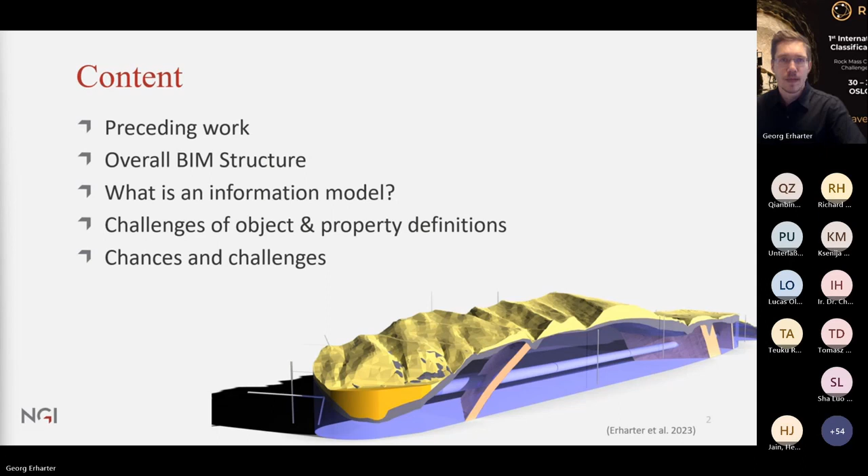So let's start with the preceding work. Information modeling has been going on for quite a while, and I think one of the first very relevant contributions came from this IFC tunnel working group, where you can also today find on the web the final draft of the requirements analysis report from 2020. As far as I know, it stayed as a final draft, but this contains a lot of interesting information. They established some very basic ideas about information models in ground modeling and BIM modeling, and they also defined sets of properties that are currently being implemented in the new IFC scheme.

This working group was active also beyond 2020, and for example, if you look into this GitHub repository, you can actually see that there is quite a lot of action going on where they are trying to implement developed data schemes in the newest IFC versions.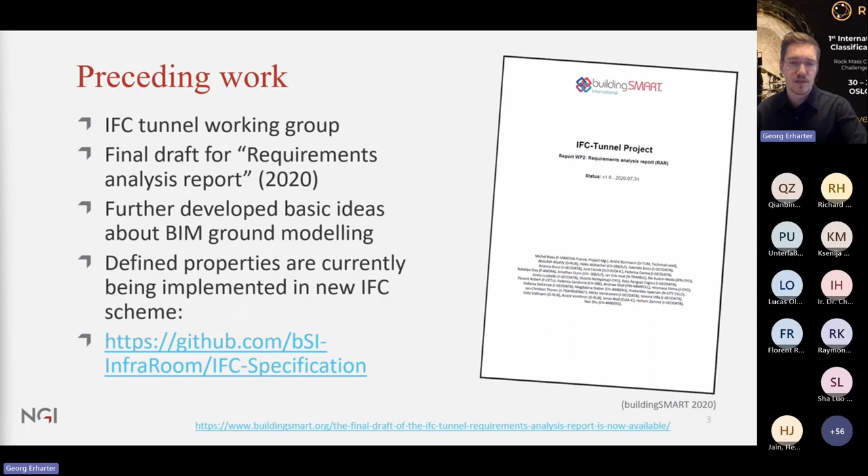So this was one of the first things, and building on that to a large degree, I want to mention the work of the DAUB, the German Deutsche Ausschuss für Untertagebau, the German branch of the International Tunneling Association, which has a dedicated group on BIM in tunneling.

This group was formed definitely before 2019. In 2019, they published the first recommendation, a very general one on BIM in tunneling, available on the web for free and in English. At that point, it gave a very good overview of this field, and when you read it today, it's still very interesting and relevant, but keep in mind, this is from almost 5 years ago. Things have changed since then.

What happened is that this working group was very, very active, especially during Corona, and they worked out and published a whole series of recommendations, a total of 5, throughout 2020 to 2022. I personally was involved in the third one, which deals with the model requirements for ground modeling, for BIM ground modeling.

Most of you are probably not German speakers, but I'd say about 2/3 of these recommendations are available in English so far, and hopefully soon all of them will be. The one I was involved in, the BIM ground modeling recommendation, gives a very broad overview and a certain guideline for a ground model and for data structures, and this is already available in English. So much for the preceding work, and next I want to hop into the topic of information modeling.

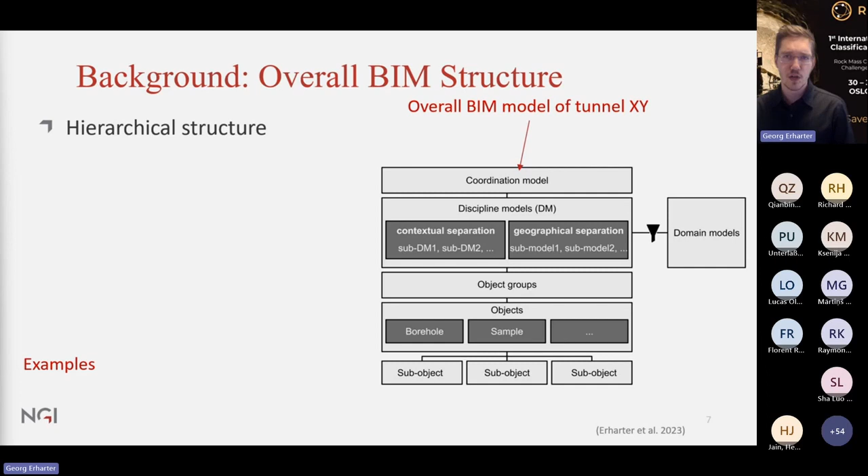Before that, let's have a look into the overall BIM structure. When we are looking at a project executed in a BIM-based way, we usually follow a certain hierarchical structure of models, objects, and other concepts. Going through this figure from top to bottom, at the very top we usually have a coordination model that combines a lot of different disciplines.

The coordination model, for example, could be the overall BIM model for tunnel XY. A level below that, we have discipline models, and the most relevant one for most of us is the geotechnical model. This feeds into the overall coordination model, but there might be others, such as a dedicated tunnel engineering model, or a model for electrical installations.

The discipline models we can usually subdivide either contextually or geographically. Contextually means dividing into a geotechnical model, electrical installation model, and so on. But we can also divide geographically, which might be necessary in very large projects, like the Brenner Base Tunnel. In such huge projects, it's not enough to only subdivide the BIM model into different disciplines; we need to subdivide it into different construction lots.

Then we have domain models. At the level of discipline models, I would say we also have domain models, and a very important point is that the BIM models are actually filtered versions of the domain models. Some of you have been modeling with things like Leapfrog before; there are other applications like Move, and ArcGIS also to a certain degree produces BIM domain models. What we do not want is to dump the whole information of the domain model into the BIM model, because for most involved parties there is not much use in that, and it just overloads the BIM model. So the discipline models are filtered versions of the domain models.

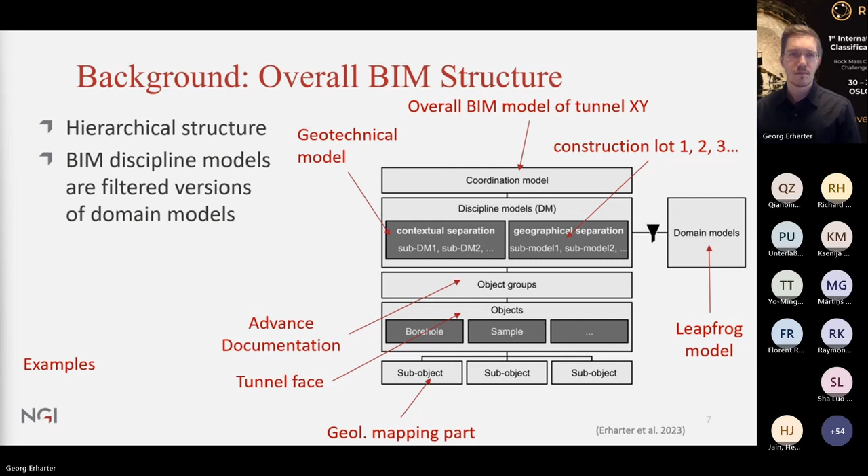Below the discipline models, we then have object groups, for example the advance documentation in general. Below that, we have objects, which could be the tunnel face. And below that, we then have, for example, a geological mapping part. If we're mapping in very fine detail and want to say that this face consists of several parts of different geologies, that could be a sub-object.

Usually these structures today are predefined and project-specific for every individual project. Even though I mentioned in the beginning the DAUB guideline and the ITA IFC tunnel working group, we have not found a common understanding or a commonly working structure for this kind of setup.

Let's dig deeper into the BIM ground model. On a conceptual level, we would structure the BIM ground model into a factual data model and into interpreted and further interpreted models. On one hand, we have factual data such as drilling, soundings, etc. On the other hand, we have interpreted models that are usually based on these factual data models.

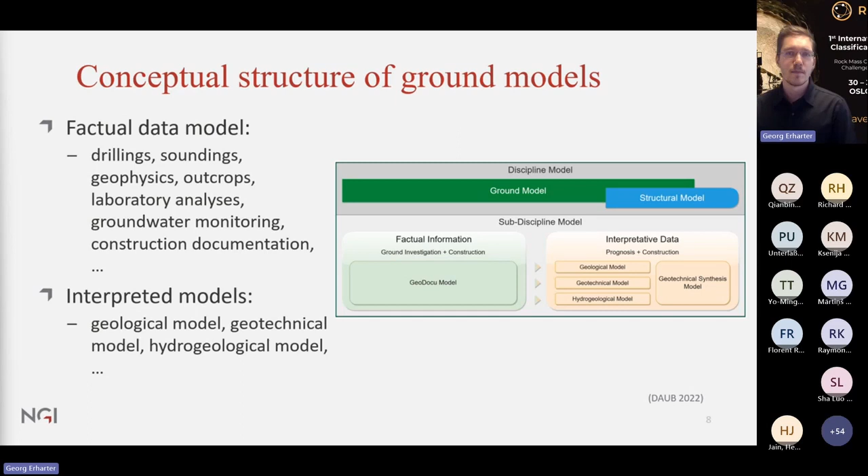Looking in more detail into the factual data models, I want to make a little bit of advertising for NGI. The factual data model is a collection of all the factual data that we deal with in geotechnical engineering. Factual in our discipline is a bit of an ill-defined word anyway, because in the context of ground modeling, I would call a borehole log factual, but in the end even a borehole log is interpreted. Still, most of us working on these projects agree that a logged core profile can be called factual, so all these observations and low-level interpretations go into the factual data model.

For example, what I'm bringing up here as an NGI advertisement is that NGI has launched, and is now also commercially selling, the Field Manager, a software that allows you to compile and collect all of this factual data in a very nicely structured way. There are other ways of doing that as well, but in the end, to create a factual data model, you have to have a data structure and a way of compiling all that information.

The base, or the factual data model, is then basically the base for everything that is coming above or beyond that - the interpreted models that we generate for the practical projects. For practical application, the factual data alone is usually not enough. We have to interpret the factual data into higher level interpretations of the ground.

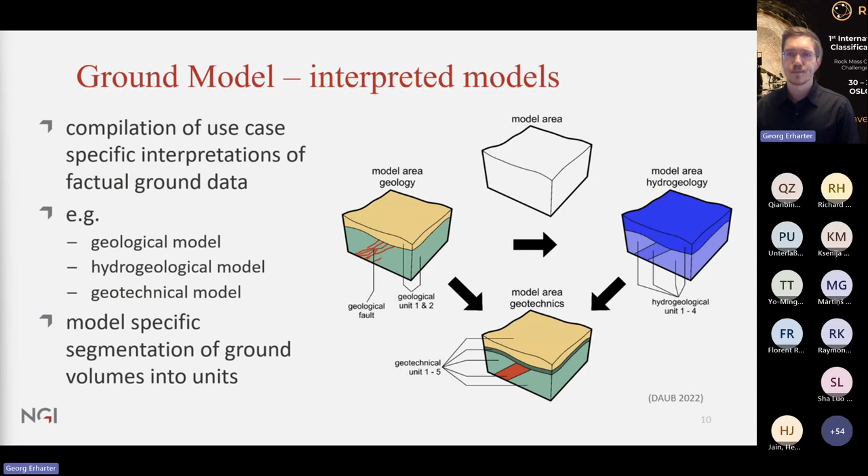So coming back to the question, what is the information model? In the end, the information model is about the definition of objects and properties for the discipline model of the ground. So we're not talking about the coordination model, we're talking about the discipline model - we're talking about objects and properties for these objects.

And the consideration behind the information model is generalizability and scalability. So the information model that we develop, especially in these working groups like DAUB, and also information models for, let's say, public rail and road authorities - they should work for a lot of projects. They should not be made for a single project, because then they're not usable for the next one. They should be working for a lot of projects.

So finally, what is the information model? I would say in the very simplest case, it's just a table. And I would have really appreciated if someone put it like that to me a long while ago. So the information model, in the end, it's not very fancy, it's not very special - it's actually just a table. You can imagine it as a table that relates objects on the x-axis and properties on the y-axis.

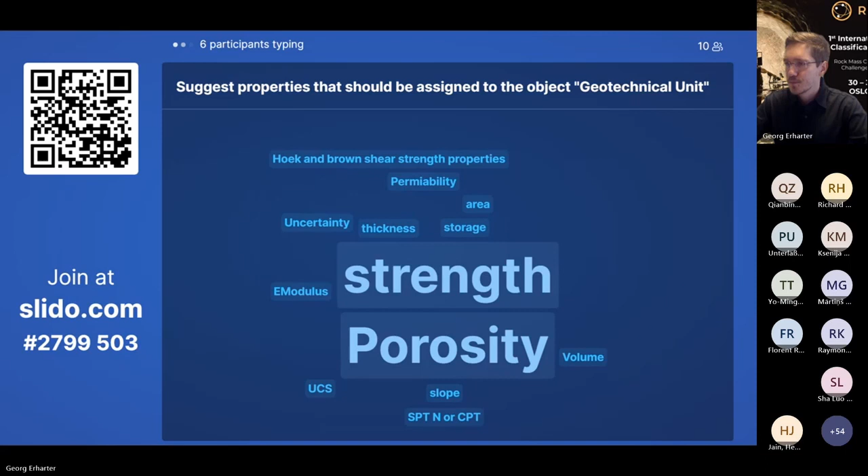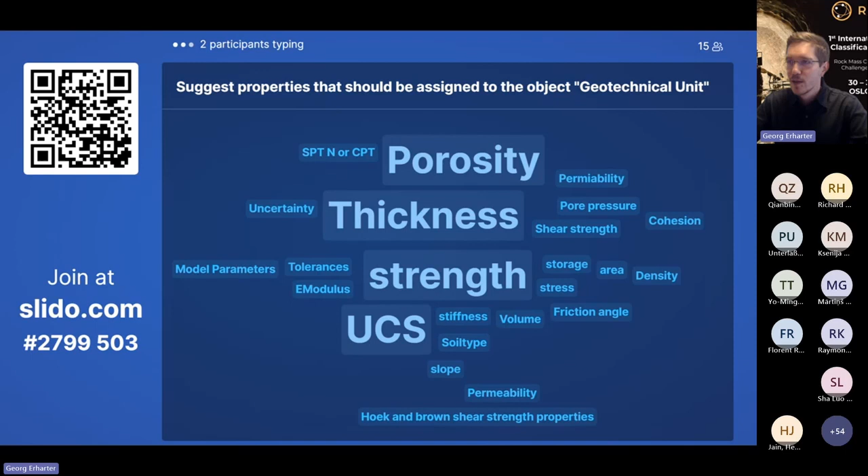So again, the question is: we have geotechnical units, which are homogeneous volumes of ground. And the question is, which kind of properties do we want to assign to these geotechnical units? We see quite some things popping up here. The more people are typing, I've learned that this Slido preview of how many people are typing is not very reliable, but let's wait a bit more.

Also, if you find some properties to be very relevant, just go ahead and submit them again. Obviously the UCS is very relevant for many people. Okay, so I will just keep on posting things here. We cannot go through everything anyway, but I will start to discuss it a little bit.

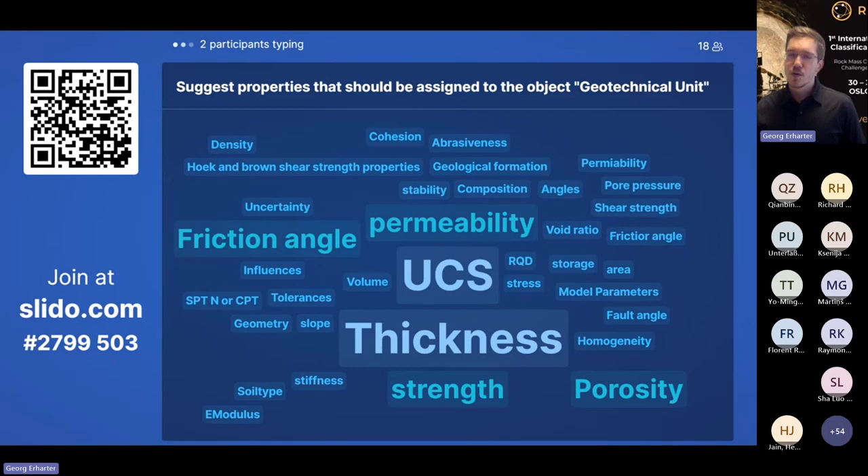It's quite interesting - I would say most of these properties popped up at some point anyway in the months and months of discussions that we've had in these working groups. So let's maybe look at the very big ones first: strength, UCS, and thickness. In principle, I agree, yes. So strength parameters - these high-level properties that describe the mechanical parameters of this unit - are of course very interesting, and there can be many cases where we actually need to assign these.

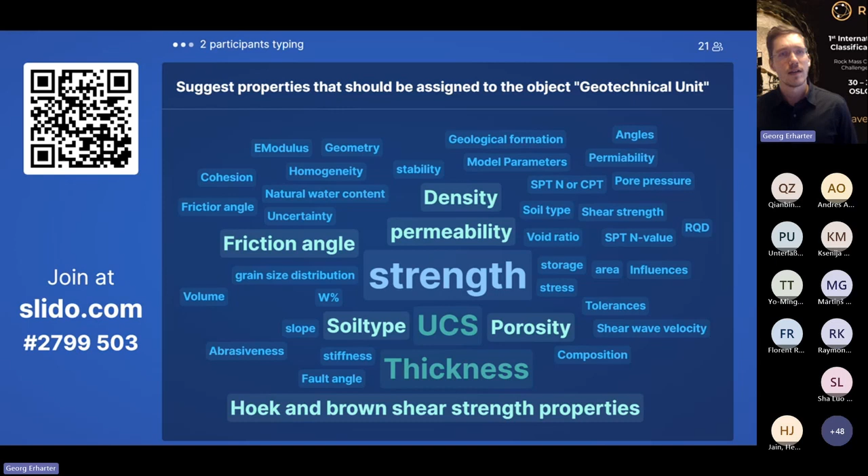The issue can, however, be that the uncertainty is kind of a problem, because an issue that we generally face is that when we assign these very specific parameters - and I see a lot of them here, like the E modulus, the UCS, the friction angle - it's getting more and more.

As we assign these very specific properties, we are also starting to represent a false certainty about what is going on, and that starts to be a challenge, especially when we're having a higher amount of uncertainty. We maybe don't have many investigations available. Then these very specific properties can be a challenge. But in general, I agree.

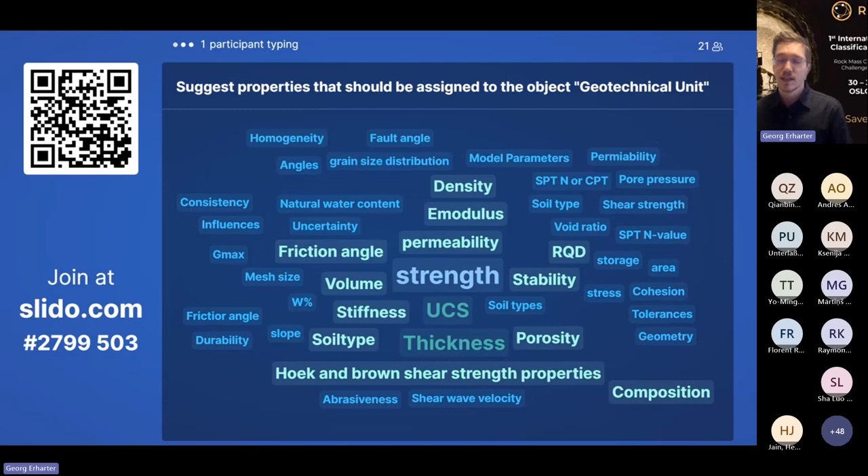So this big group of direct mechanical properties is, of course, very important. The thickness, for example, is an interesting one, because I also see geometry here and things like that. Thickness and geometry is interesting because these volumes have a thickness, and these volumes have a geometry.

So the question is, if I have a property describing the geometry that is already present, isn't that a bit redundant? But I personally agree that some properties, for convenience, can be there to represent the geometry a bit better. When I have this ground volume, I can measure the thickness at any point, of course. But if we're dealing with sedimentary layers with a constant thickness, it can be very practical to have a property called thickness, because then I just need to click onto the ground volume and I will get the thickness immediately. So these things can be done.

What else do we have here? Yes, the same goes for area, and then more high-level things like uncertainty and these kinds of things. It always depends on how you want to represent this. Uncertainty could just be a text that says, I'm very uncertain about what's going on here, or you can find a more fancy method of actually communicating the uncertainty.

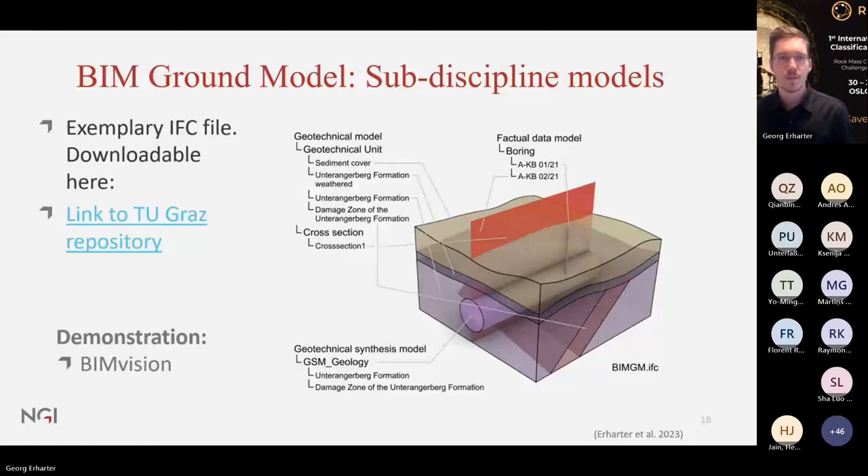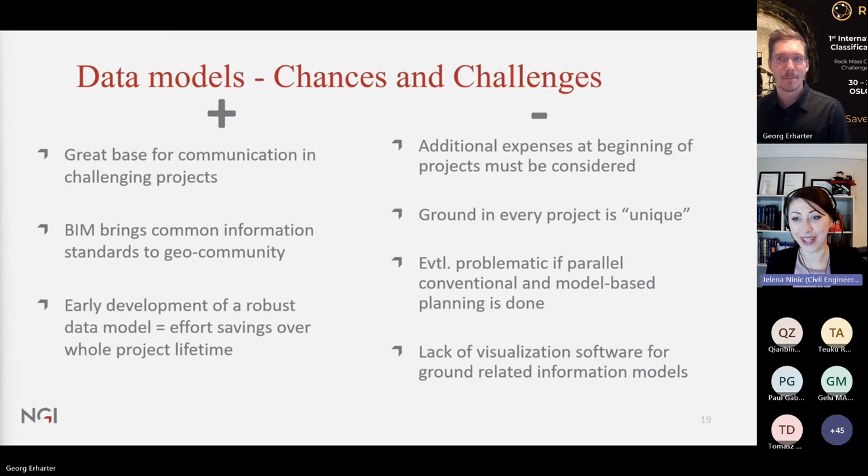Absolutely, thank you very much, Georg. And I would like to thank you, Richard and Qianbing, for really insightful presentations. I'm sure that our guests online will also go back to their daily work with lots of impressions, lots of thoughts, lots of new ideas.